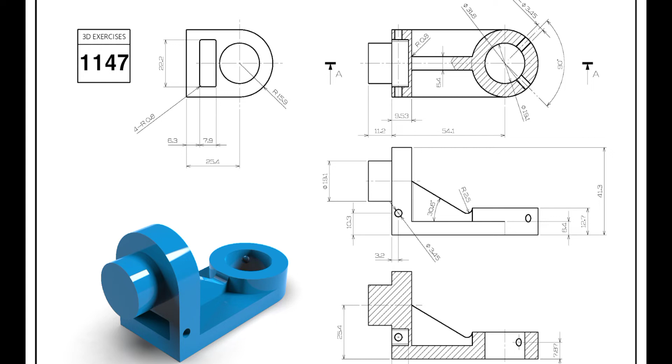In this video, I will explain a tutorial to make this design.

First, we use the top plane. After that, we click Sketch and choose the center rectangle.

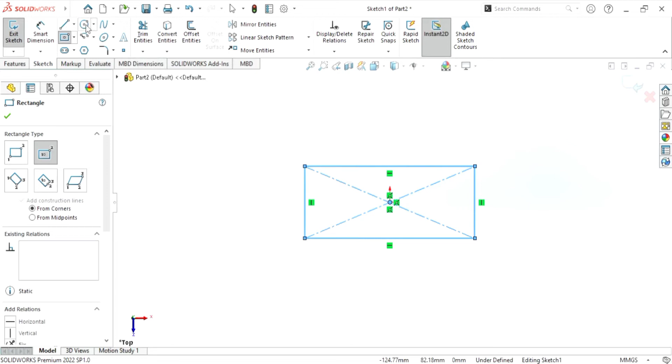Next, we choose circle for the side rectangle, and we add another circle inside here.

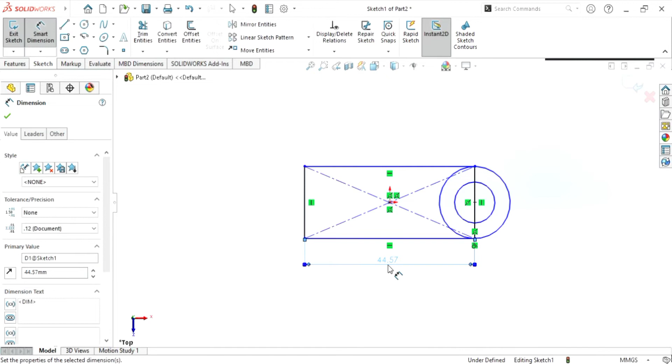Next, we smart dimension the rectangle with size 54.1 minus 9.53 mm. Here with size 31.8 mm.

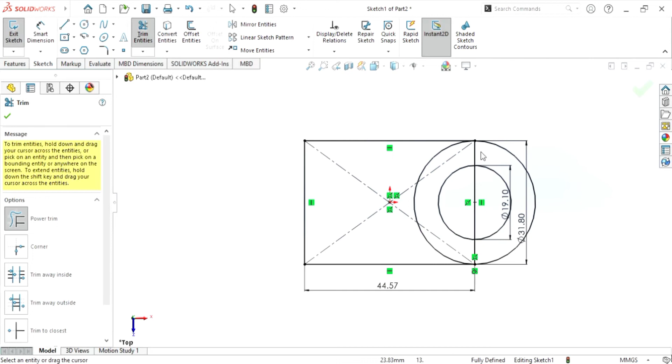After that, we choose trim entity for a cut line in the middle of the circle.

Next, click Features and Extruded Boss/Base. Select this part with thickness 6.4 mm.

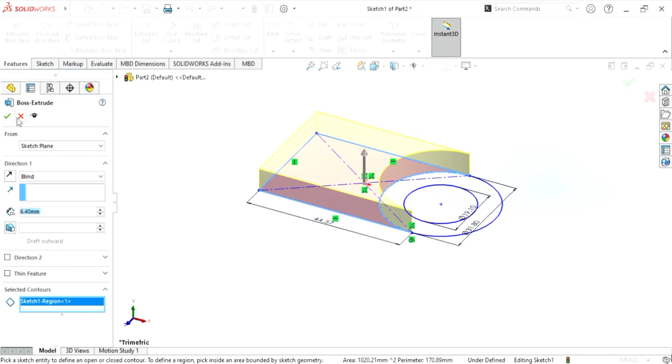And choose Sketch and click Extrude, then select this part of the circle with thickness 12.7 mm.

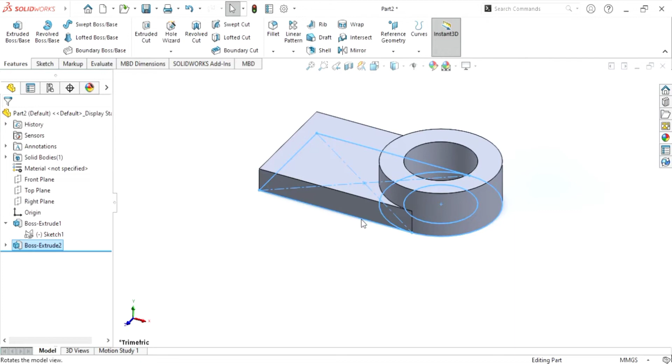And then rotate view to see the front and side. Click this section and Sketch.

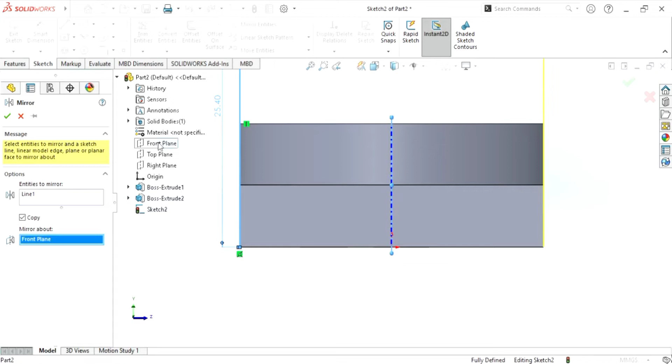And then add center line, following the size of the insert line.

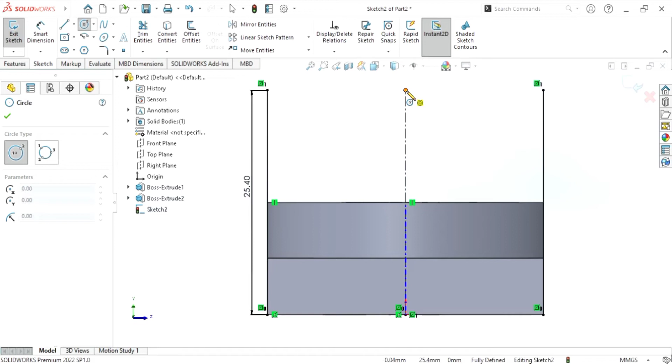Add circle in the center line, and another circle inside here.

Smart dimension the circle with size 31.8 mm, and the circle with size 15.9 mm.

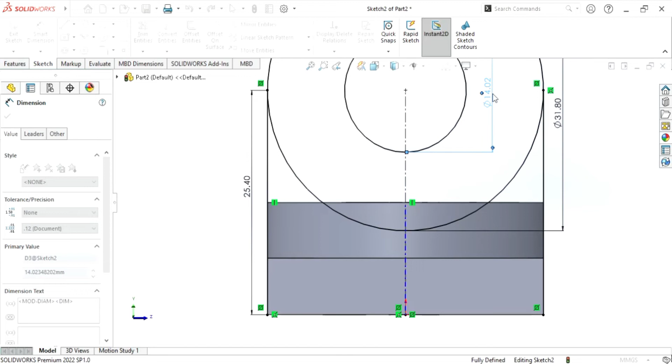Next, we go into Features and Extrude. Then we select this part to extrude with size 9.53 mm.

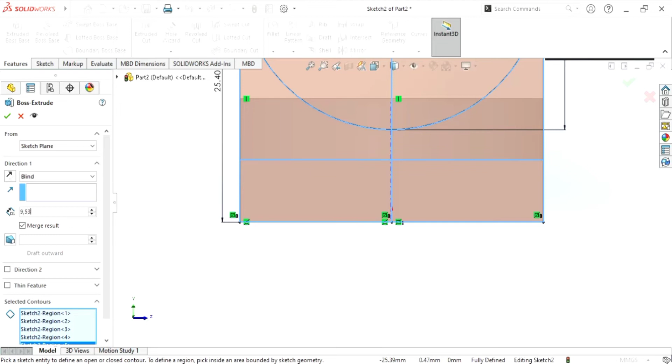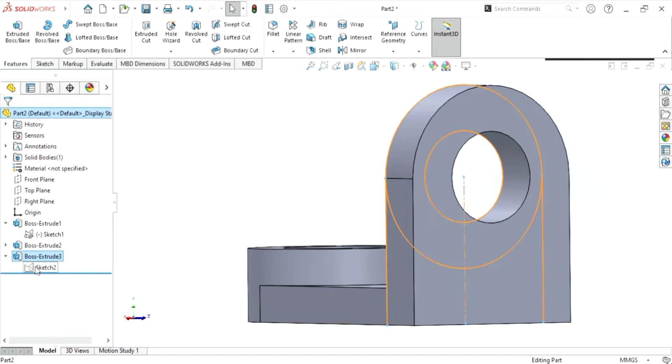Okay, after that, rotate view and go to Sketch, Features, and extrude the circle with thickness 9.53 plus 11.2 mm.

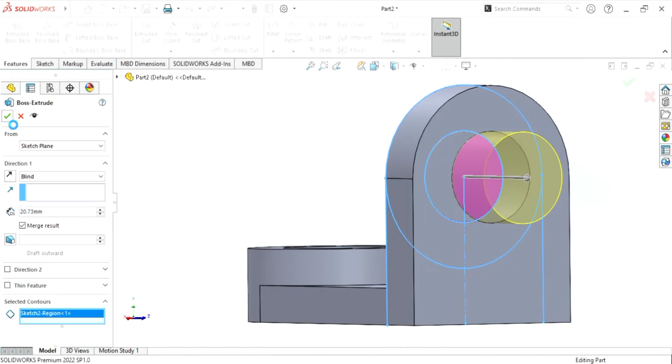And then sketch this section.

And we're going to the center line for the middle in this part.

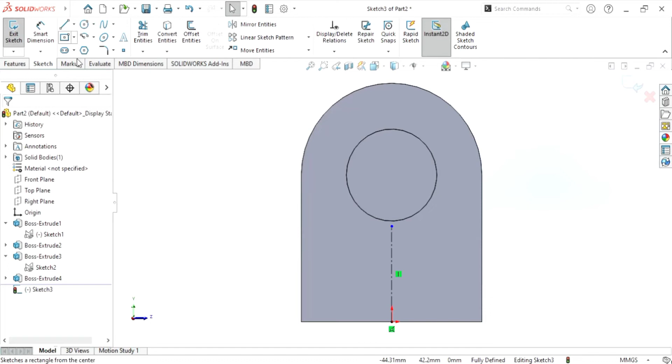And then we add a center rectangle and smart dimension with size 22.2 mm.

mm for the bottom, and for the side with size 7.9 mm.

And for the side and the bottom lines, size with 6.3 mm.

Next, we're going to sketch fillet with size 0.8 mm for each side of this rectangle.

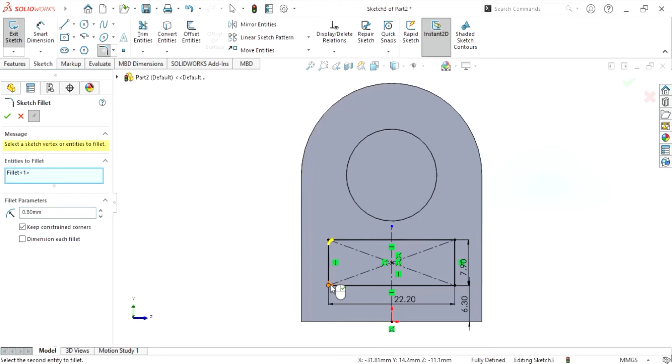Then we're going to Features and Extrude Cut with a depth of 8 mm.

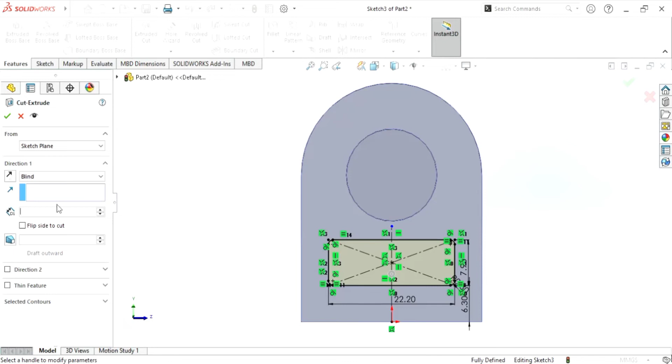Rotate view to see the side.

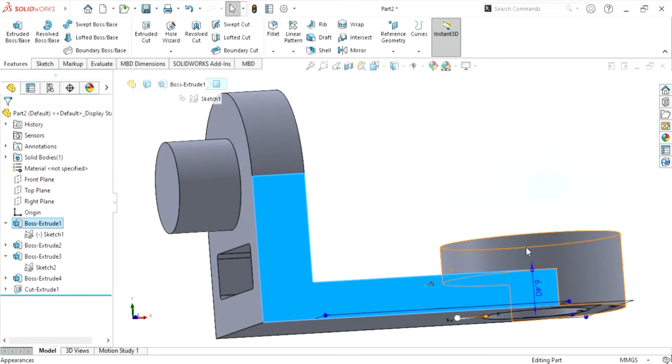Next, choose this section and sketch.

To make the circle with size 3.45 mm.

And smart dimension from the middle of the circle until the bottom lines, size 10.3 mm.

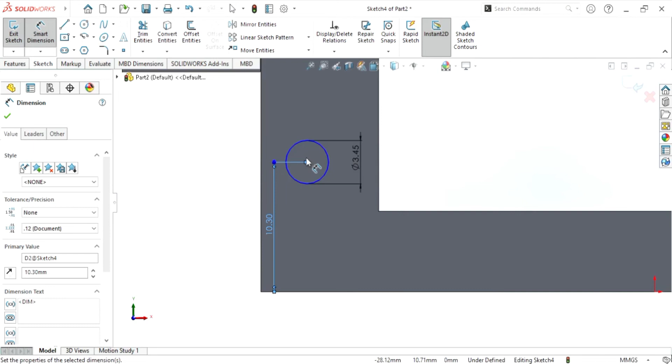And the middle of the circle until the beside lines with size 3.2 mm.

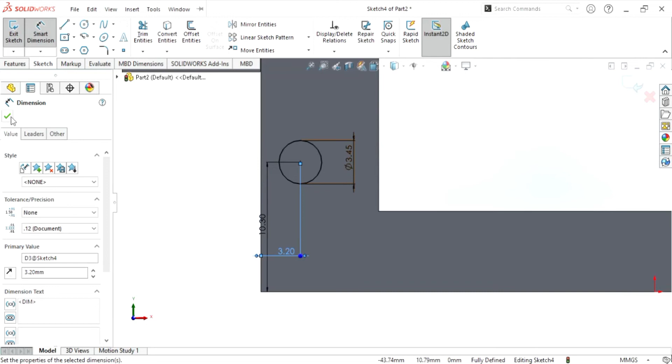Next, we choose Features and Extrude Cut. For the circle, we choose Through All, both.

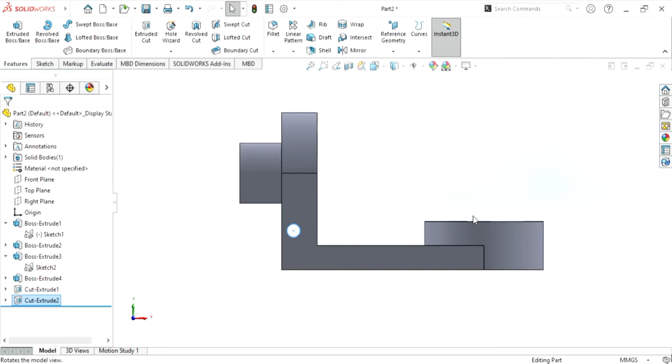We can see the circle turning into a hole.

Now we go back to click front plane and we choose Sketch.

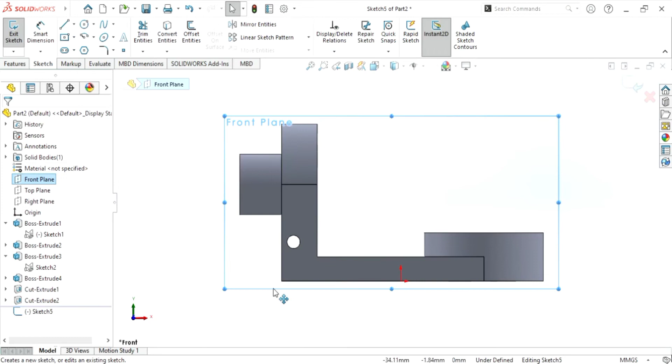Then we're going to insert line for this section until this section.

Okay, next we choose Features and click Rib for the line with size 6.4 mm.

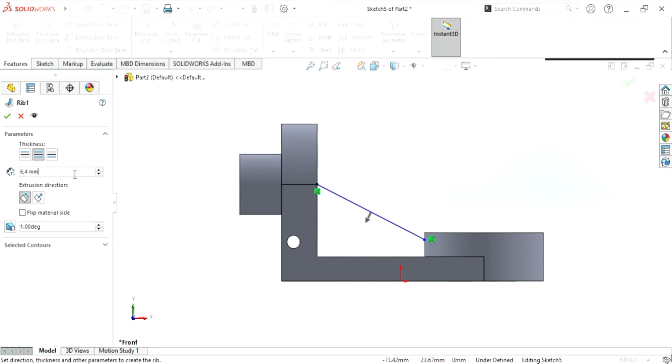Okay, rotate view to see the top plane and we choose fillet with size 2.5 mm.

For this line in the middle of this section.

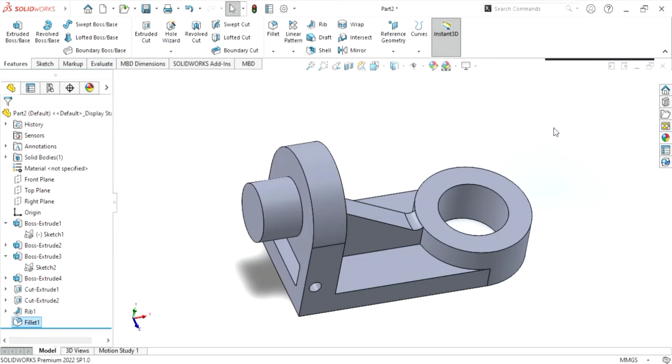Okay, after that we're going to fillet again for this line.

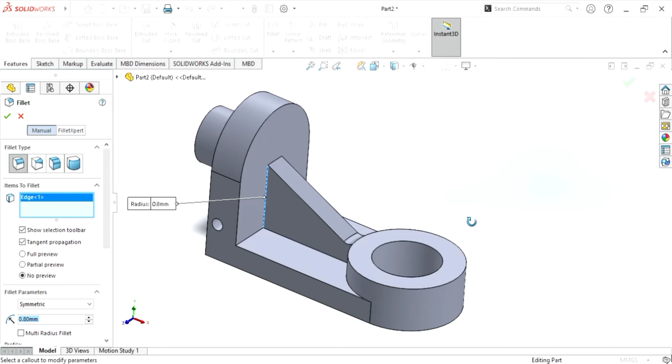And this line with size 0.8 millimeter.

And we go back to top plane.

And we sketch with the center line from the middle of the circle.

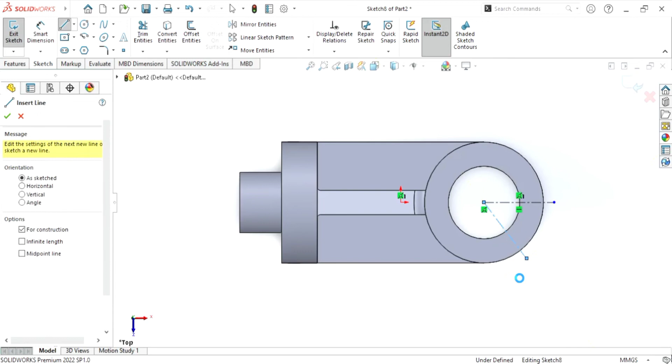Now we're going to smart dimension to make a corner with size 45 degrees.

Because in here we can make a corner for 90 degrees.

And we click exit sketch and we're going to Features and Reference Geometry.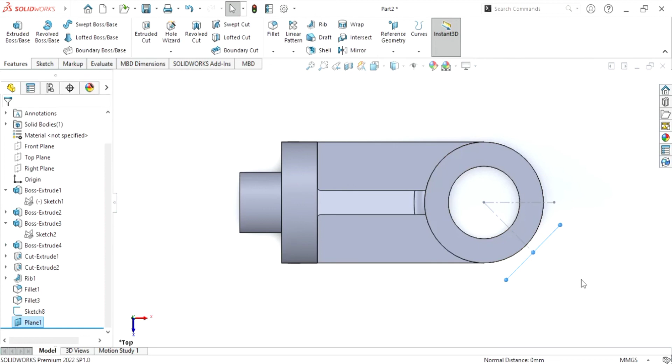We choose this plane, and then we rotate view to see and we click the Normal To tool.

Then we sketch, and now we're going to center line.

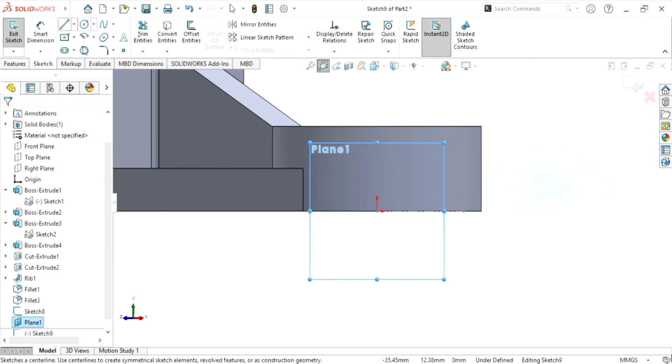And we're going to circle for this, in the middle in the center line.

Now we smart dimension with size 7.87 millimeter.

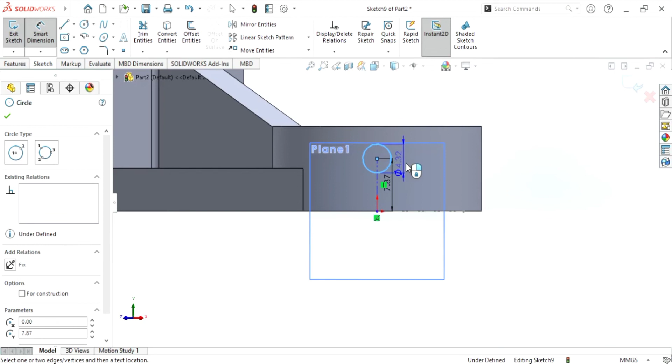And for the circle with size 3.45 millimeter.

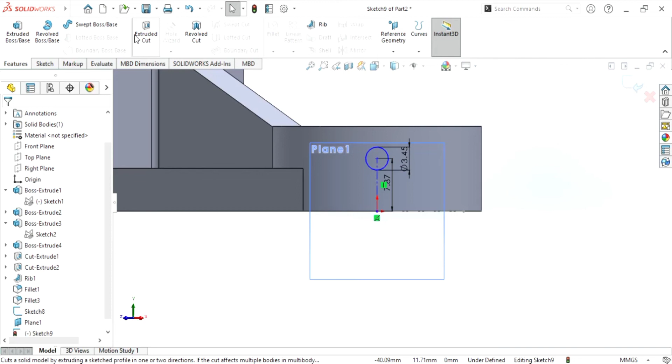Next, we're going to Features and Extrude Cut, and then we choose Up To Next.

Now we rotate view to see more clearly.

And next we go to mirror, and we choose the front plane.

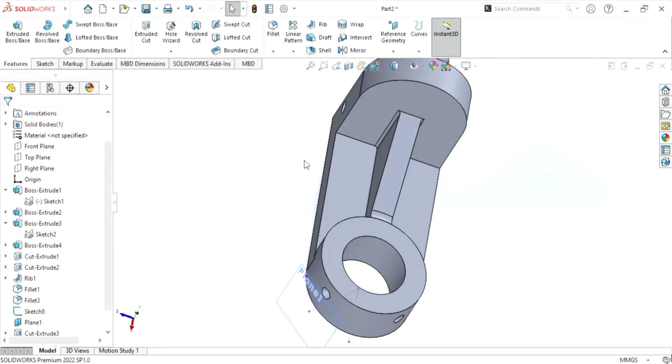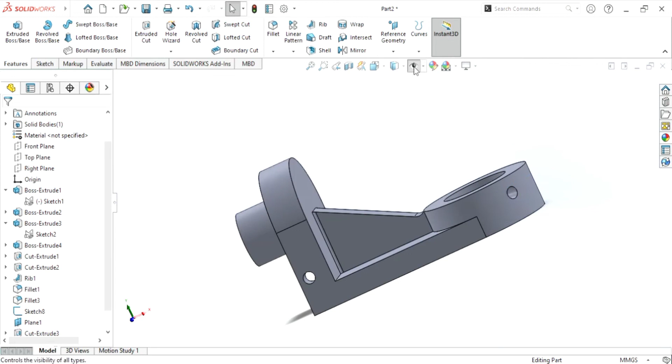Now we rotate view again to see more clearly. You can rotate view if you want to see more clearly.

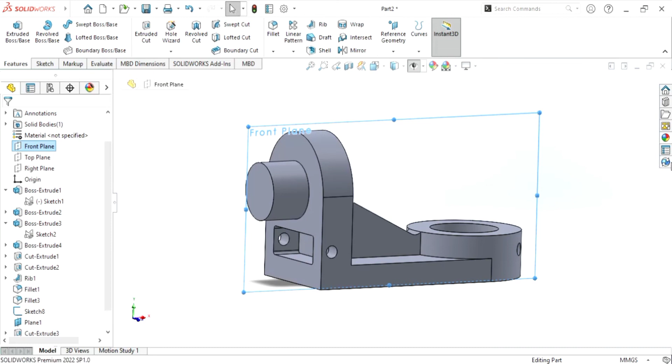And now we can change the color. I choose plastic and high gloss, and the colors we choose blue.

As you can see, the design is done and the finished result looks like this.